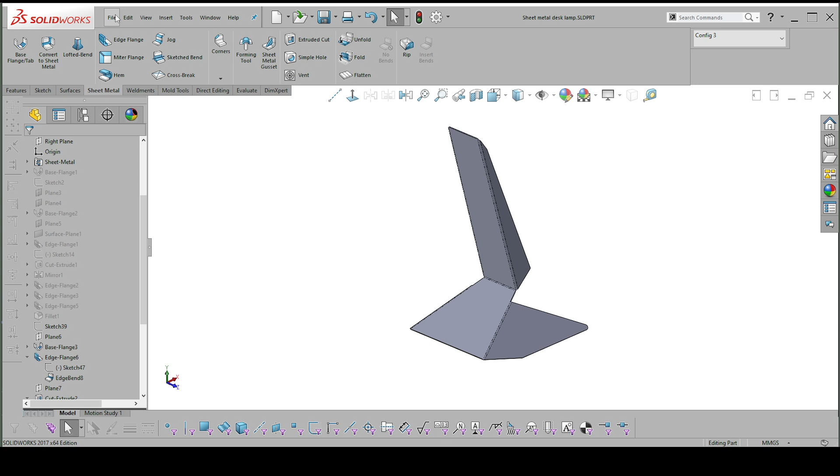So here's my model. I'm going to go to File, Make Drawing from Part, select. I'm not sure which one's going to work here. I think I should probably need a larger sheet, maybe an A0 sheet, but let's see what happens.

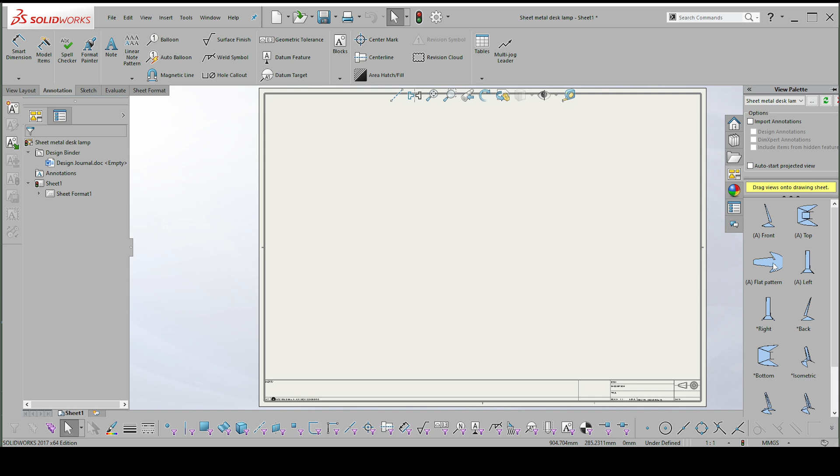Okay, so what you should get is somewhere in here is a flat pattern item. I'm going to drag this flat pattern across first. We don't need it first, I'm just going to drag it across to show you that you can do it.

And you can see there's immediately a problem here, right? So that's in config 3. I haven't shown you this, but you can actually select the configuration that you want. So let's try config 2.

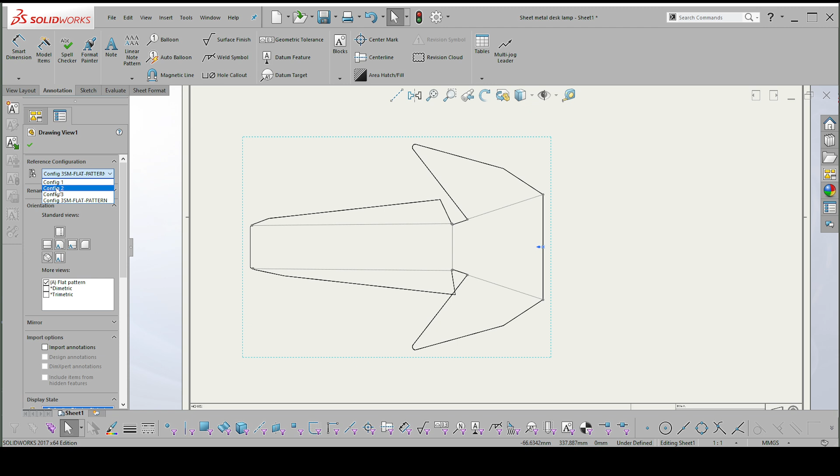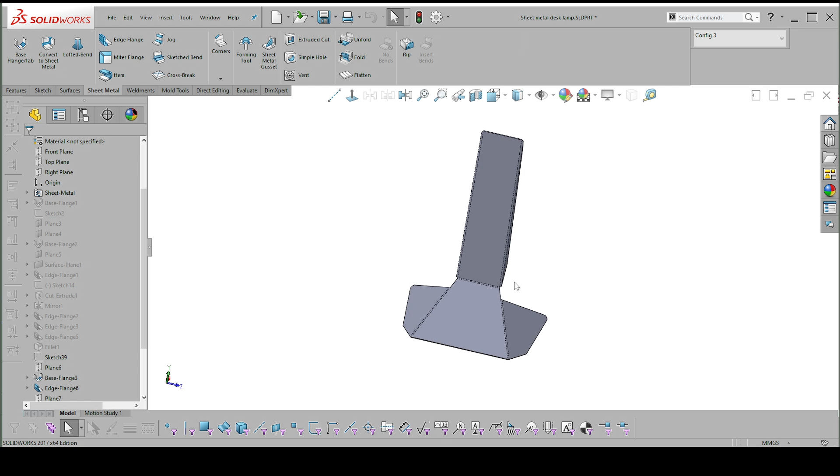There, that's better sorted. So what I need to do is go back into my model and just sort that little problem out first. So let's just go back to this one. This has to do with this arm here, which is not in the right place.

So if I flatten this item, you'll see that's how you check first. You can see that those two are interfering with one another. So I just need to go back here and alter that sketch. I'm not going to do that in the interest of time.

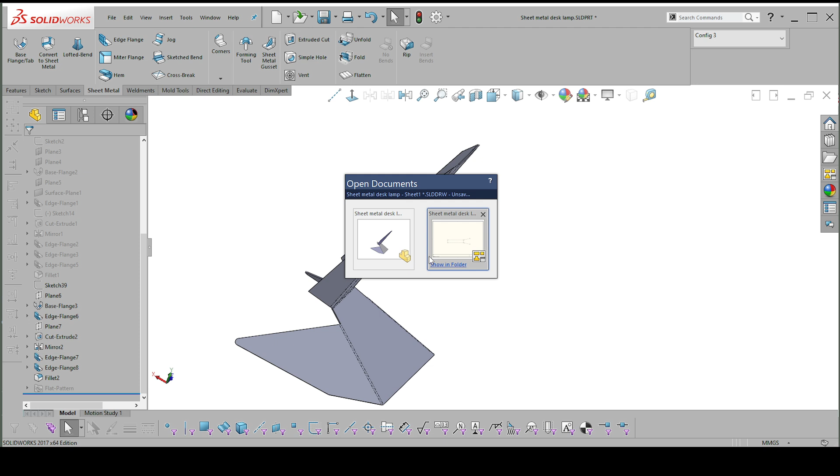Now, this has disappeared for a second. You might need to rebuild it. There you go. If you rebuild it, you get everything in one shot. All right, so that's the flat pattern.

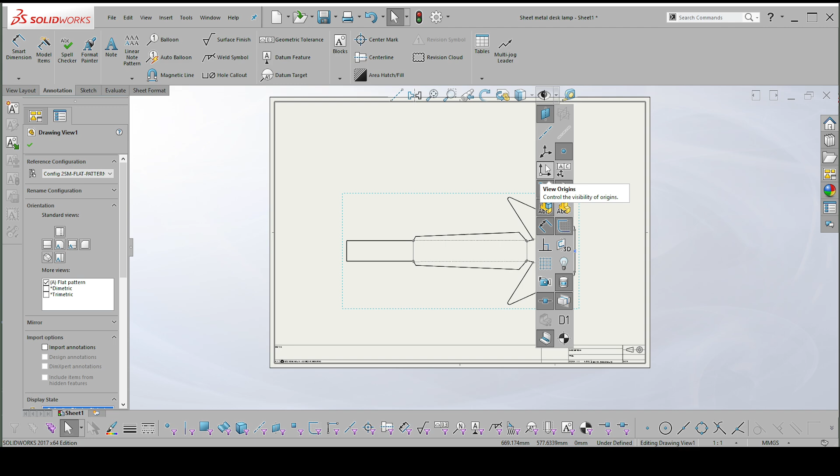And I'm going to hide my origin. What else you would need is you would certainly need a front and a side view, or a front or a top view. And I can see immediately that I'm going to run out of space.

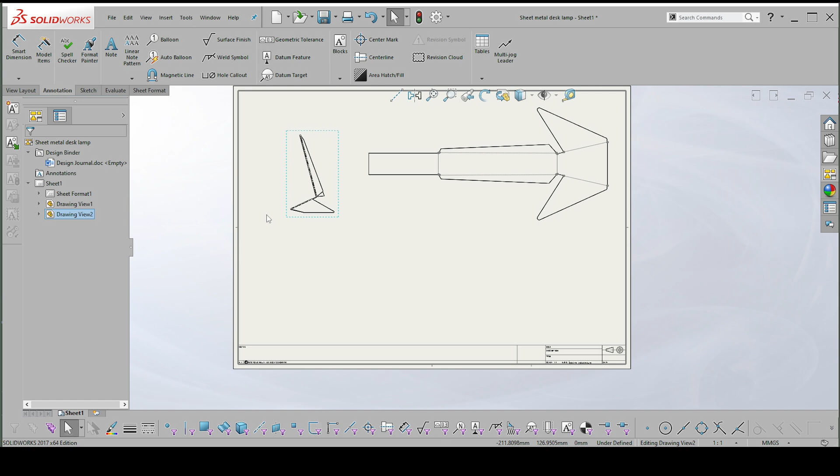So normally I would do this as a 1-to-1 thing. I'm going to do it as a 1-to-2 just for now. Right, so there's my primary view. I can get a secondary view like this.

And it makes no sense whatsoever here to dimension these items other than to provide the overall dimension, so to go from there to there.

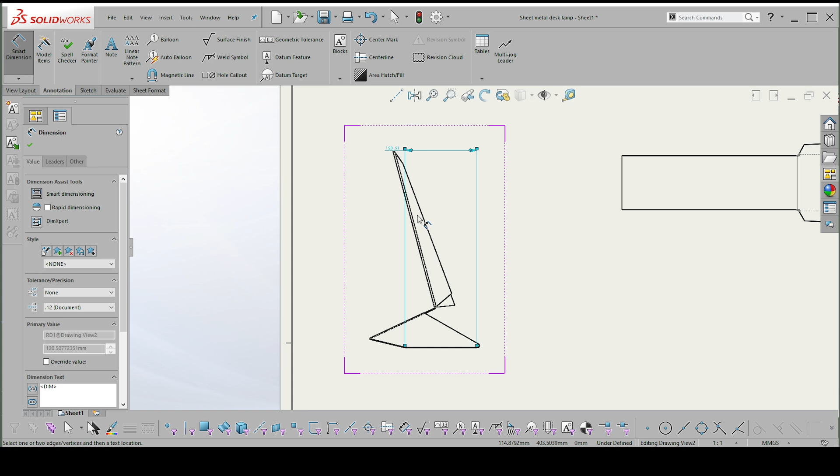And I've noticed something - this is in fact the wrong configuration. Oops, I deleted the whole view. So I want to delete that dimension. It's the wrong configuration - just go across to your drawing view design tree and select the right configuration.

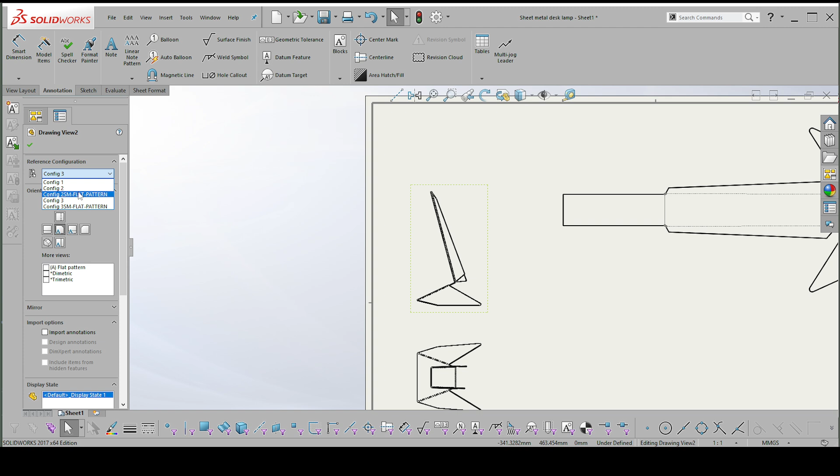I don't want the flat pattern one, I want this one here. There it is there. Okay, so that view there reflects this one here.

And it seems this one here is also the wrong configuration, so let's just change that as well. There we go. All right, so all sorted.

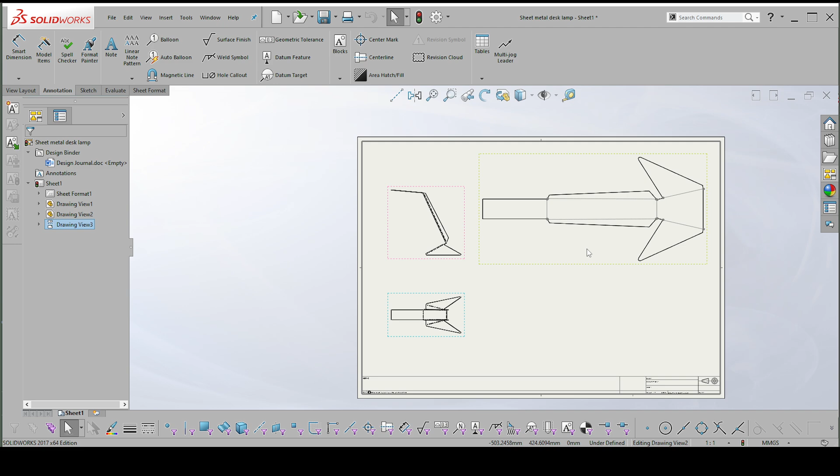The way you would dimension this is obviously this needs a center line. So I would then introduce a center line and I would select 2 features on my model, get the center line, drag it across.

Now, ordinarily you wouldn't dimension this. I'm going to ask you as part of your project to dimension it just to give you some practice in dimensioning, in particular position dimensions. If you've got items inside here like cutouts or whatever, that would be even better.

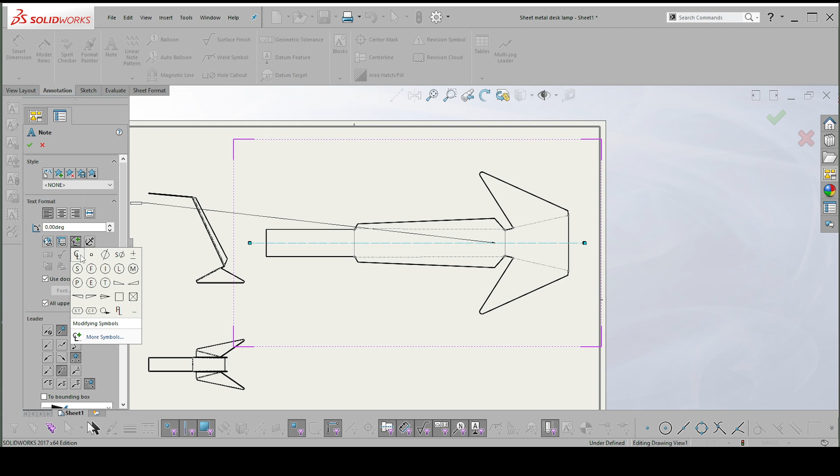So from here I would go to the note. I would select my add symbol button, the CL, just get rid of this leader, place one here, click, place one there, click, or escape.

I'm going to select both of those and I'm just going to change the font. So use document font - I'm going to untick, go to font. Let's make this something quite large, 18. Okay, so there's your starting point.

And then datums would be obviously datum feature. This would be your primary datum.

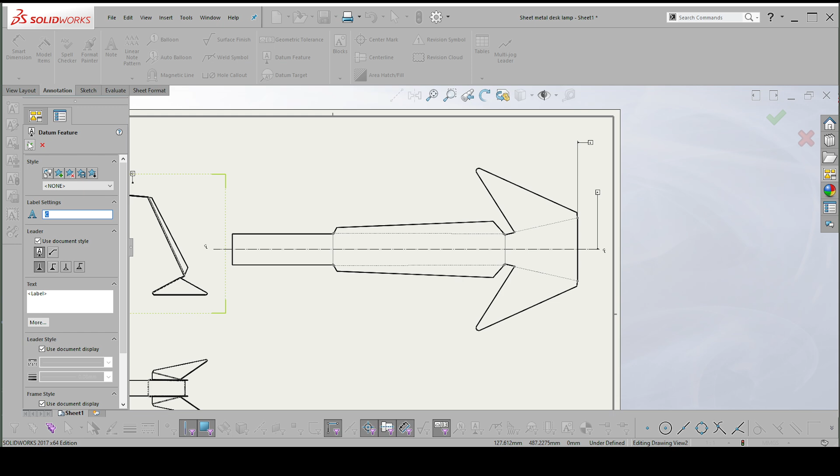It would make sense for this base here to be your secondary datum. And there is no third datum because this is a flat view, so it's only those two. The only view that you need to dimension is this view. You would not dimension anything about the thickness here—that goes in the notes column at the bottom, where you'd specify the material, the finish, the gauge, which is the same as the thickness, those sorts of things.

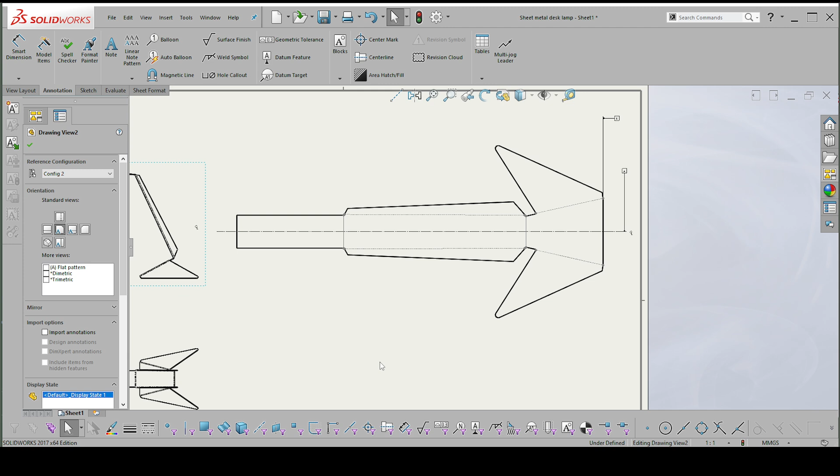All right, so that's all you need. Then you need to just go dimension step by step. You need to go from there to—and here we're missing something, and we only need to do half. At the moment this kind of makes sense because there's an angle here.

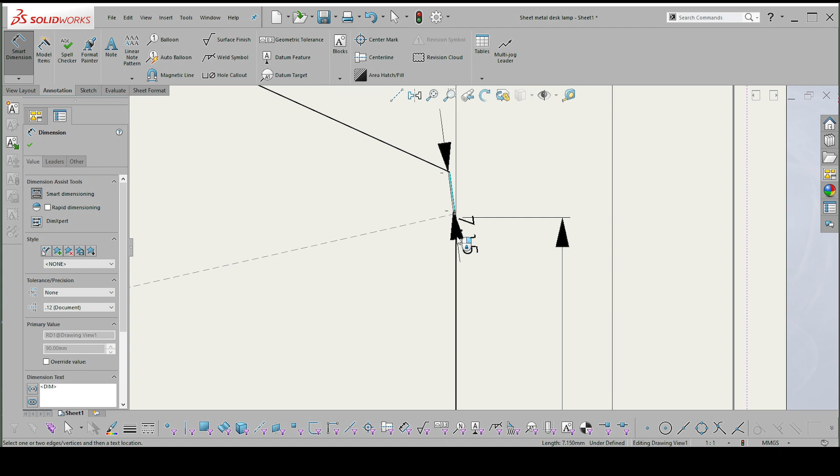So I would need to dimension this angle as, for instance—so please do pull things like this out. As I said, please don't show this to your toolmaker. You wouldn't go doing this sort of thing, but I do want you to practice.

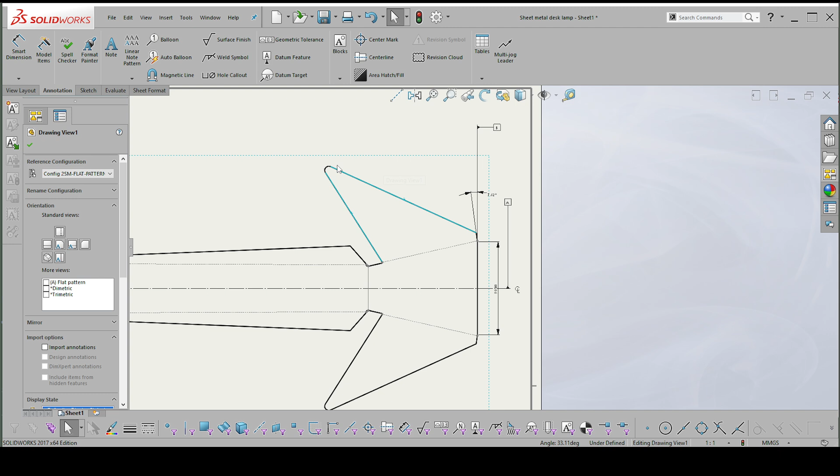So I'm going to need some—what do you call them—virtual sharps in here. There's one. I don't think I really need the second one, but I'm going to put it in. And then I would dimension—yes, I do need it—I dimension from there to there.

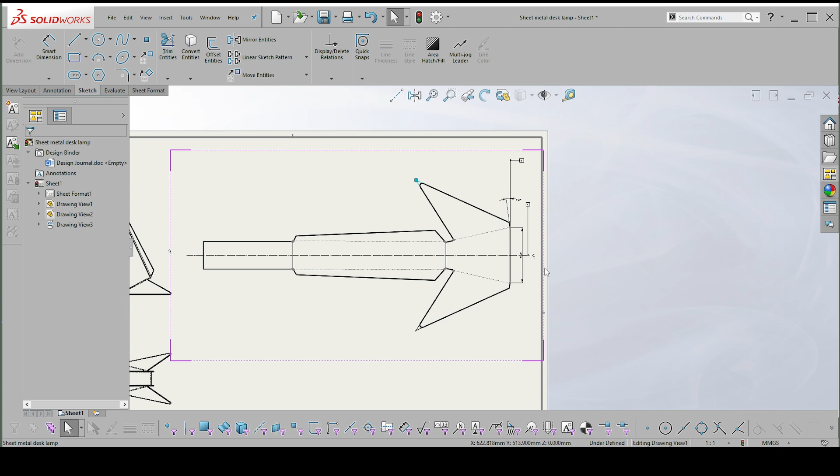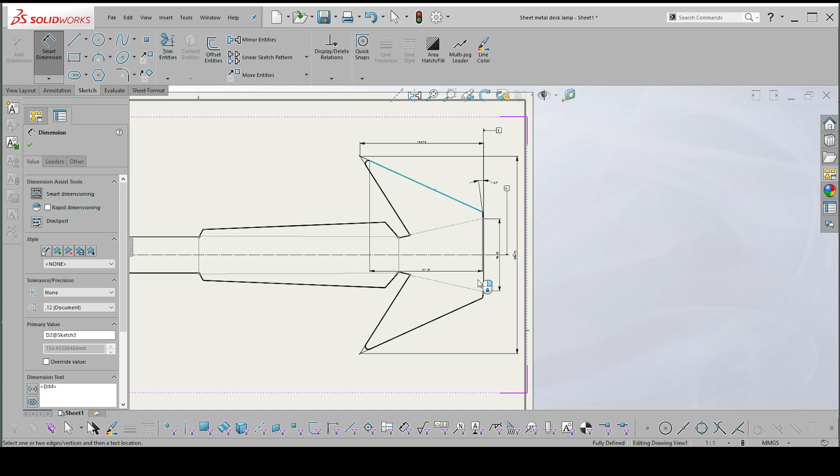Because obviously that width is important, so from there to there. And I would then dimension the height, so that's those two position dimensions. And then I would give an angle between these two items here.

I'm not going to do all of this—I'm just showing you the basics of what you need to do. You would then do all of your dimensions across the center line. In this case it's silly to get this to go all the way out, although I can. And I should then be able to put a jog in here. I'm not sure if it's going to get it done right now—I might have to show you a bit later.

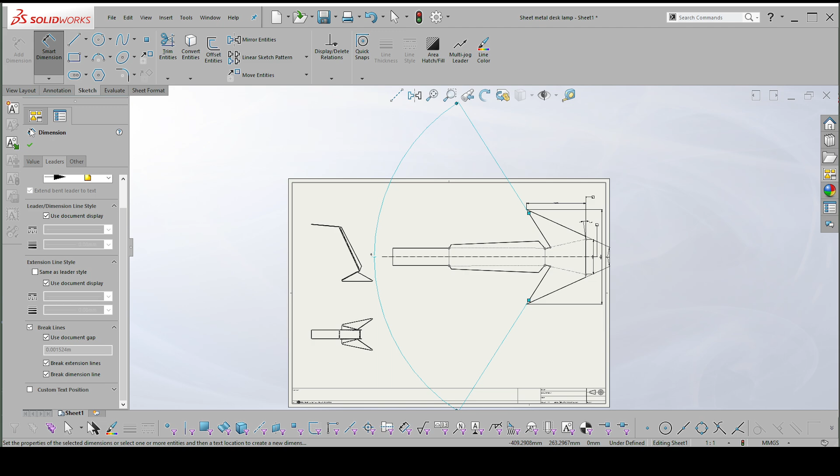Here we go, break line—break existing ones. I will show you in another video how to give this a jog and get it to break so that you can put the dimension outside and out of the way.

All right, so once you've got a whole lot of dimensions in place—so you've got widths, for instance—and I'm showing you this just to show you that you don't need to organize everything as you're going. Doesn't seem to want to do that one. Let's try that again. From there to there—no, it's not right. So please don't do that kind of dimension.

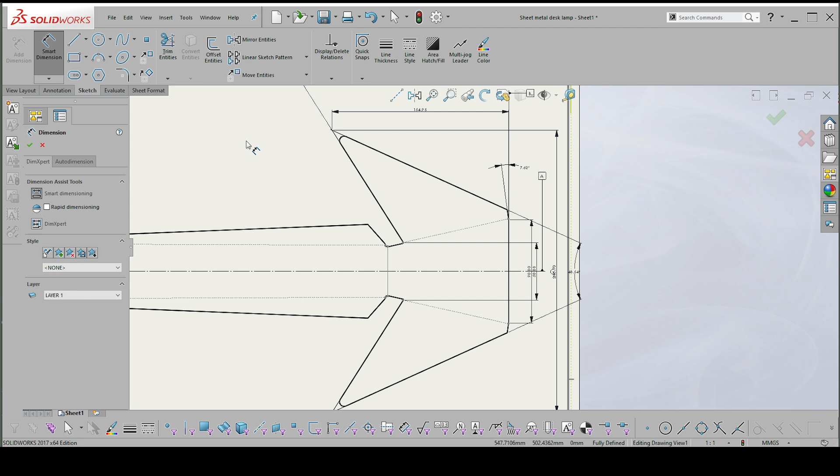That's a line segment. I need position dimensions first, and then if it makes sense to put other ones in place. Right, so there we go—there it is there. All right, so that's an angle that I've got there, and I need to give another one, which is the actual width.

Seems not to want to cooperate today. Okay, if that's happening to you, you should be able to go to the sketch points—I think sketch points will work. Let's see—no, it's not that one. Vertices. There we go, there we go. That's much easier, says he.

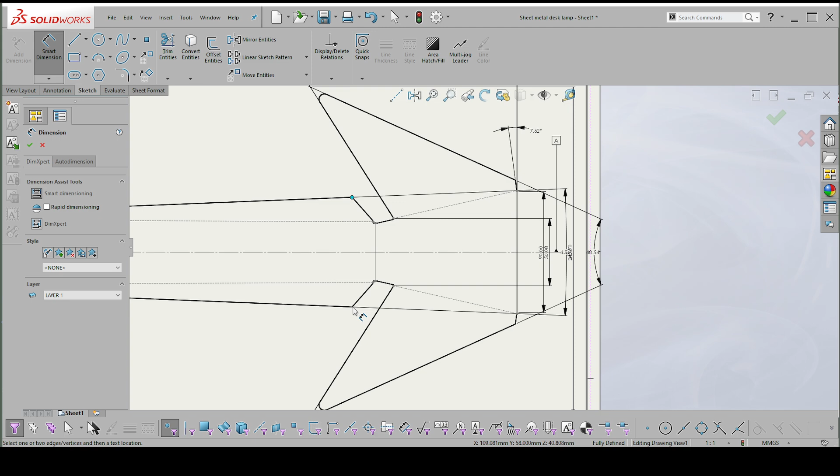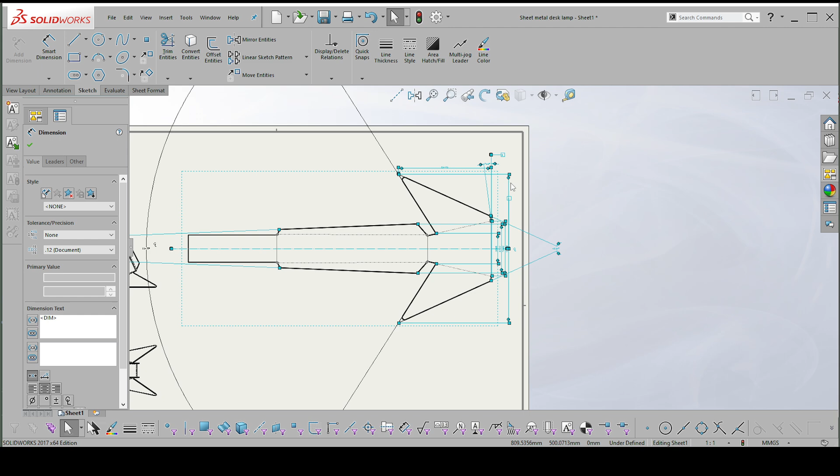All right, so here we go, I've got a nice big mess of dimensions. All I do is select all of them, right click, and say align and auto arrange, and it'll do it for me. Then I might just have to pull some of these out to make them all legible. But you can see it's arranged them from smallest to largest as they should be, and given them proper spacing.

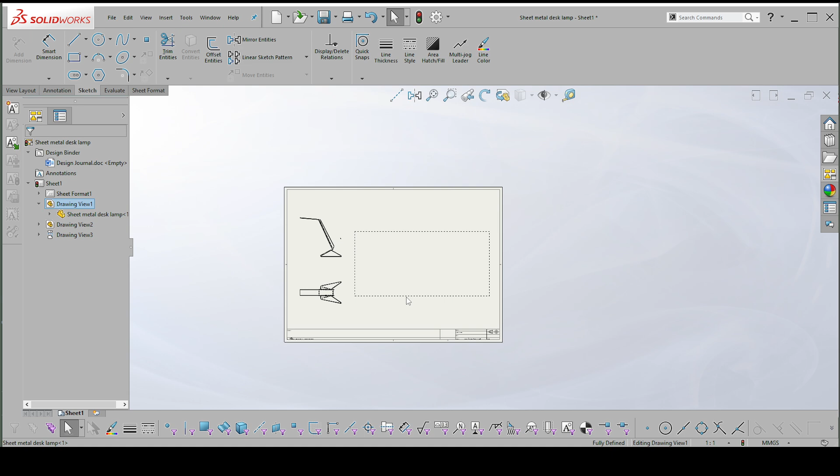Right, and that would need to come in a bit. Okay, and if everything's as you want it to be, you can then just pull this around to where you need it to be. As I say, I should actually have a larger unit here, and then we need to get this jog in.

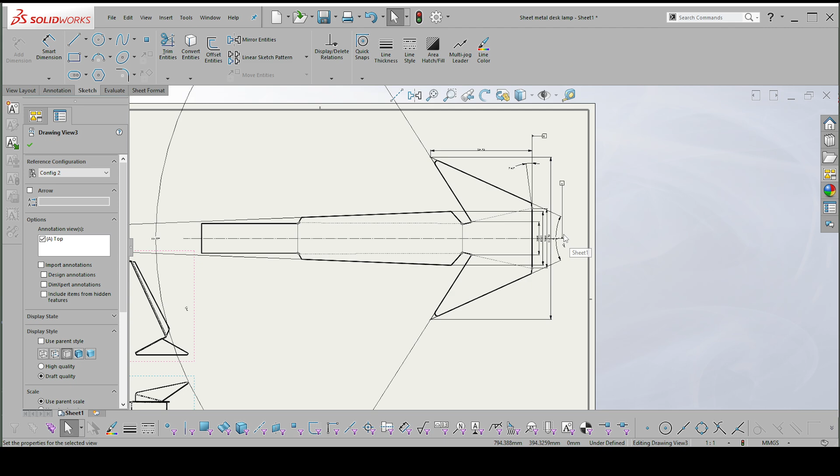So I hope that helps you. I'm going to ask you to please do a very neat and legible and thoroughly dimensioned drawing, which should be fun. Thanks for watching.